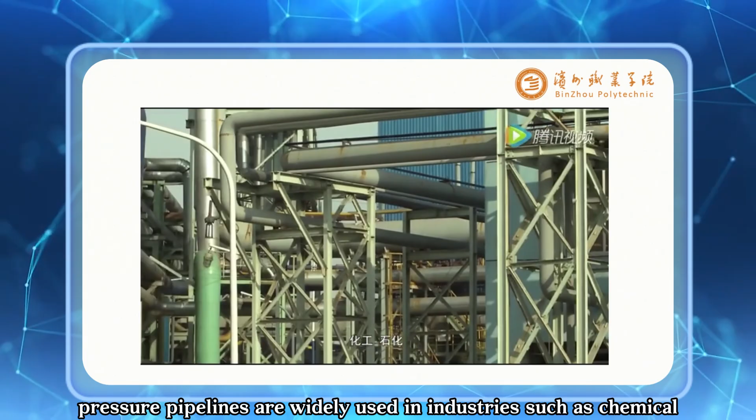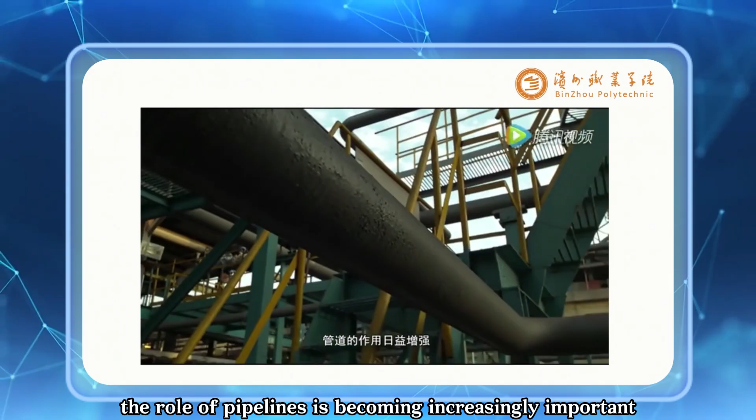As special equipment, pressure pipelines are widely used in industries such as chemical, petrochemical, petroleum, electric power, light industry, and metallurgy, as well as in urban gas and heating systems. With the economic development of our country, the role of pipelines is becoming increasingly important. They are regarded as the blood vessels of factories and the major lifelines of the nation.

So, what exactly are pressure pipelines? Pressure pipelines refer to tubular equipment that utilizes a certain pressure to transport gases or liquids. They are defined as pipelines with a nominal diameter greater than 25 millimeters, designed to carry gases, liquefied gases, or steam media with a maximum working pressure greater than or equal to 0.1 megapascal gauge pressure, or liquid media that are flammable, explosive, toxic, or corrosive with a maximum working temperature greater than or equal to the standard boiling point.

What is the role of pressure pipelines? This is a massive operation in resource allocation, a grand shift of natural gas. They traverse mountains and cross vast oceans, traveling hundreds, thousands, or even tens of thousands of kilometers, ultimately reaching cities and factories across China. From the West to East Gas Pipeline to the Sichuan to East Gas Pipeline, and further to the Central Asia, China-Myanmar, and China-Russia gas pipelines, these projects collectively form China's natural gas transportation network.

With resources in the West and demand in the East, a massive disparity has emerged. To bridge this gap between supply and demand, a cross-country energy transmission system has become imperative. Pipelines are the optimal solution for transportation because, unlike rail, road, or water transport, once constructed, they enable 24-hour uninterrupted delivery. Unaffected by weather conditions and ensuring high efficiency, they truly kill multiple birds with one stone.

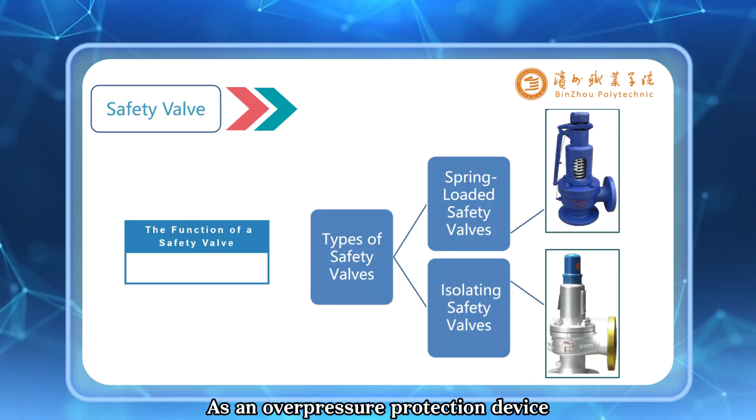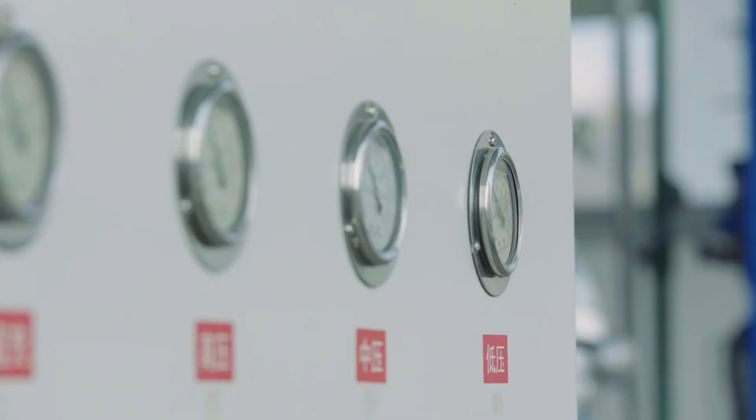First, as an overpressure protection device, the function of a safety valve is as follows. When the pipeline pressure rises above the allowable value, the valve opens fully to vent the medium, preventing the pressure from continuing to rise. When the pressure drops to the specified value, the valve closes promptly to ensure the safe operation of the equipment and piping. Common safety valves used in pressure pipelines include spring-loaded safety valves and isolation-type safety valves.

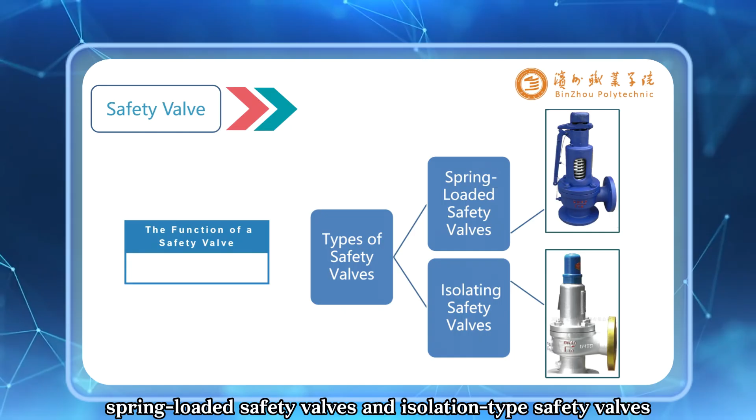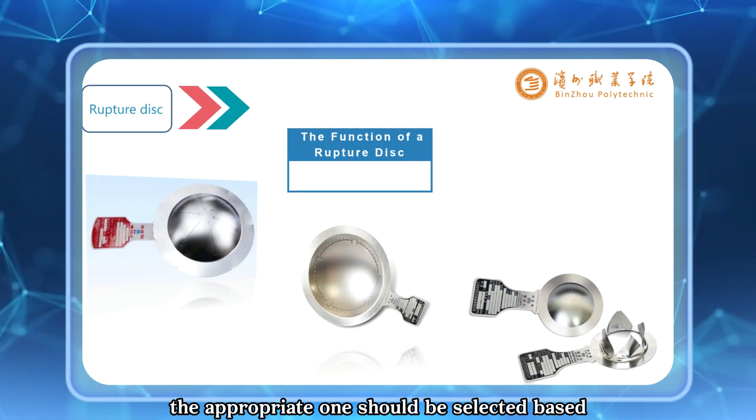Second, the function of a rupture disc is as follows. When the pressure of the medium in a pressure pipeline exceeds the disc's design burst pressure, the disc ruptures, releasing the medium from the pipeline. This causes the pressure to drop rapidly, thereby protecting the main equipment and the pressure pipeline. There are many types and specifications of rupture discs. The appropriate one should be selected based on operational requirements, including the allowable medium pressure, the phase of the medium, and the pipe diameter.

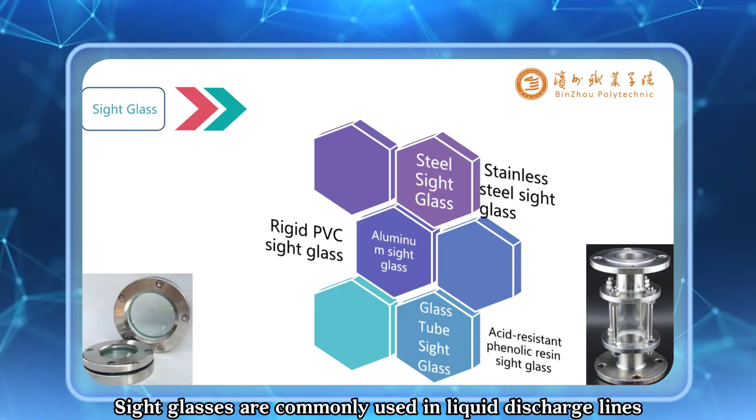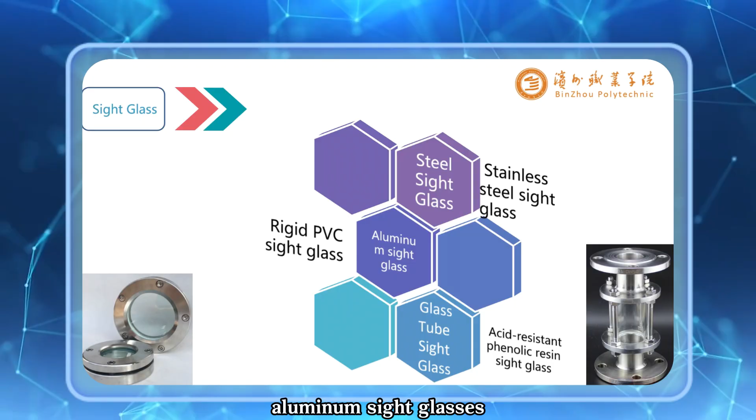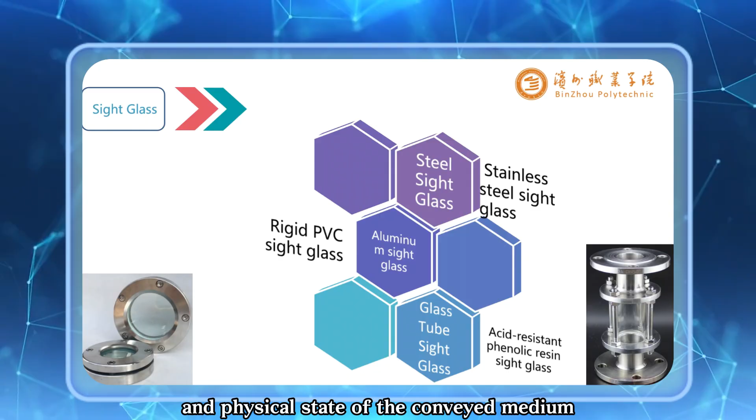Third, sight glasses are commonly used in liquid discharge lines or in liquid pipelines such as reflux and cooling water lines before receiving tanks to observe liquid flow. Common types include steel sight glasses, stainless steel sight glasses, aluminum sight glasses, rigid PVC sight glasses, acid-resistant phenolic resin sight glasses, and glass tube sight glasses. Sight glasses are selected based on the chemical properties and physical state of the conveyed medium, as well as the process requirements for the sight glass's functionality.

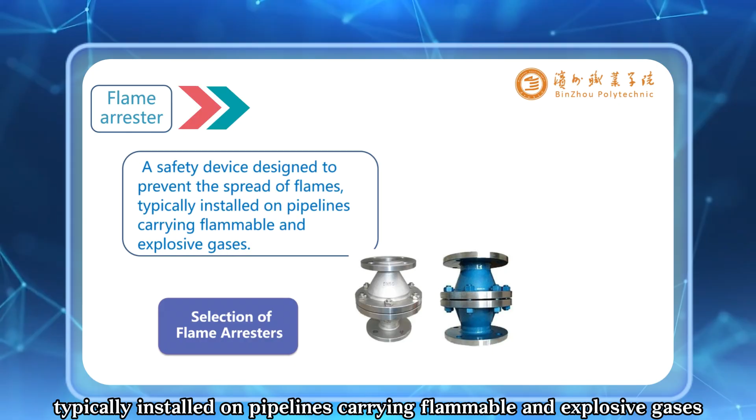Fourth, a flame arrester is a safety device designed to prevent the spread of flames, typically installed on pipelines carrying flammable and explosive gases. In the event of an accident in one section of the pipeline, it prevents the incident from affecting other sections of the pipeline or associated equipment. For certain flammable and explosive gases, such as acetylene, 3 flame arresters are required on the pipeline between the filling cylinder and the compressor. There are many types of flame arresters, and their selection must meet the following requirements.

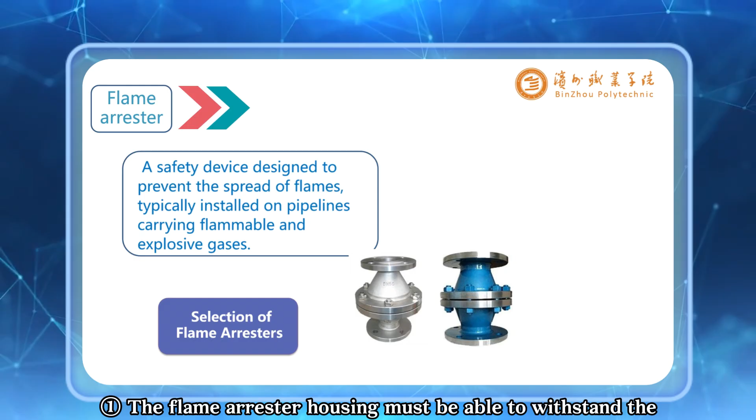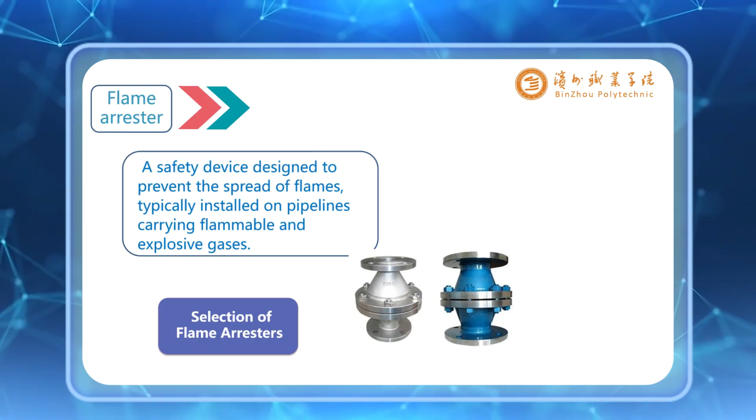The flame arrester housing must be able to withstand the pressure and permissible temperature of the medium, as well as resist corrosion from the medium. The packing material must have sufficient strength and must not react chemically with the medium. Select an appropriate flame arrester based on the chemical properties, temperature, and pressure of the medium.

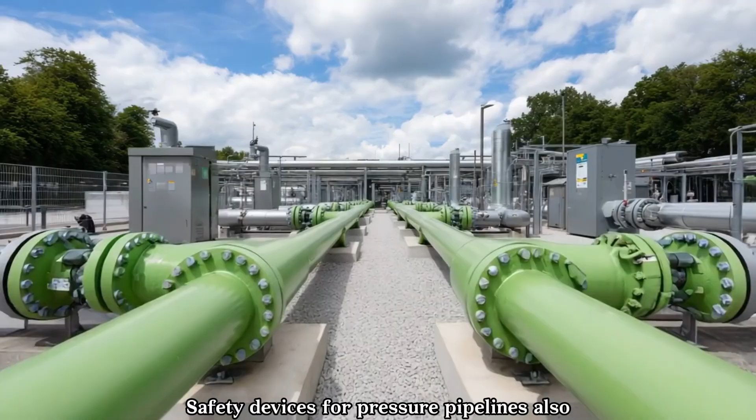Fifth, other safety devices. Safety devices for pressure pipelines also include pressure gauges, safety water seals, and safety vent pipes. The primary function of a pressure gauge is to display the pressure within the pipeline. A safety water seal serves both to provide safe pressure relief and to prevent the spread of fire in the event of a fire accident. Vent pipes primarily serve to provide safe pressure relief.

In this lesson, we have studied safety devices for pressure pipelines. That concludes this lesson. For further reflection, please consider: briefly describe what types of leakage, explosion, or poisoning accidents are likely to occur if safety devices on pressure pipelines fail, are missing, or are operated in a defective state.